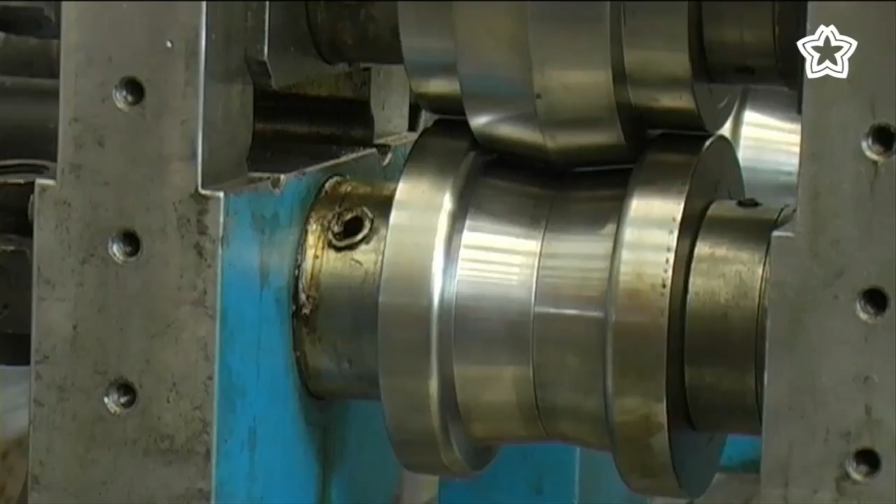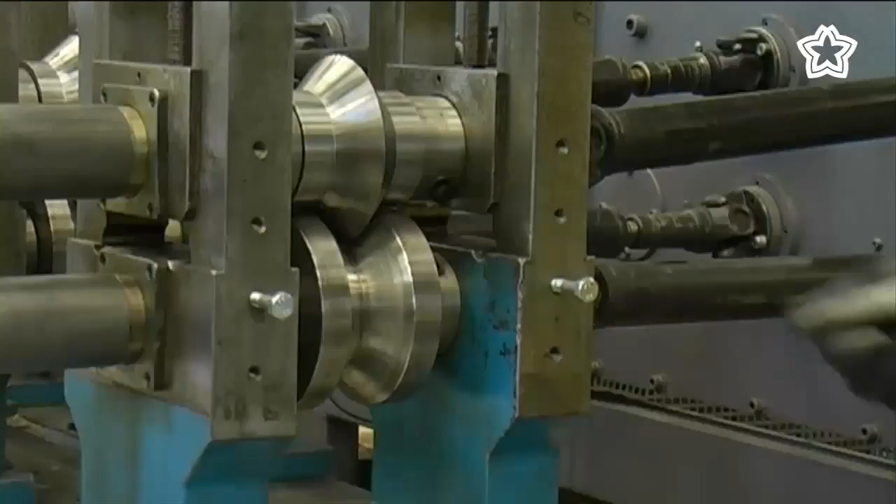Roll forming is a process where a metal sheet passes through a series of roll stands that change the sheet's shape. The sheet undergoes what is called a profile bending. Roll form details are very common in, for instance, the furniture, construction and car industry.

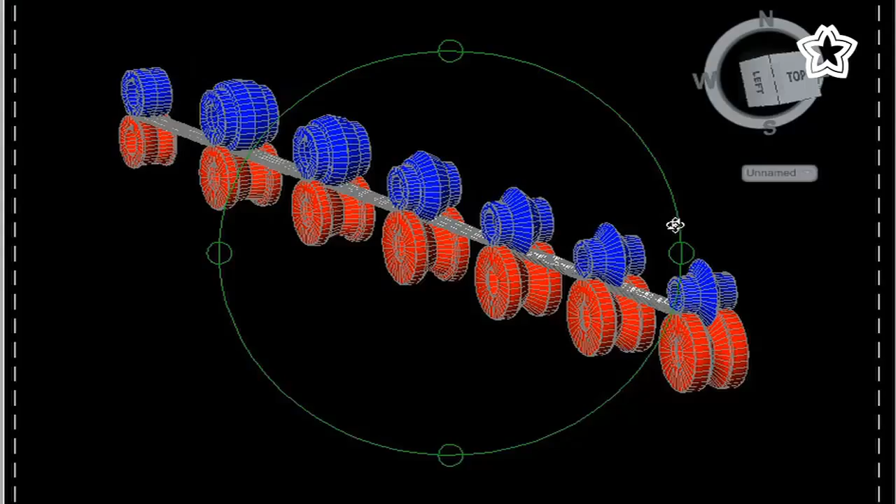It is possible to create advanced profile shapes in high-strength materials, and many different materials can be used. All materials that can be bent can also be roll formed. Roll forming is gentle on the material and has a minimum of wear on tools.

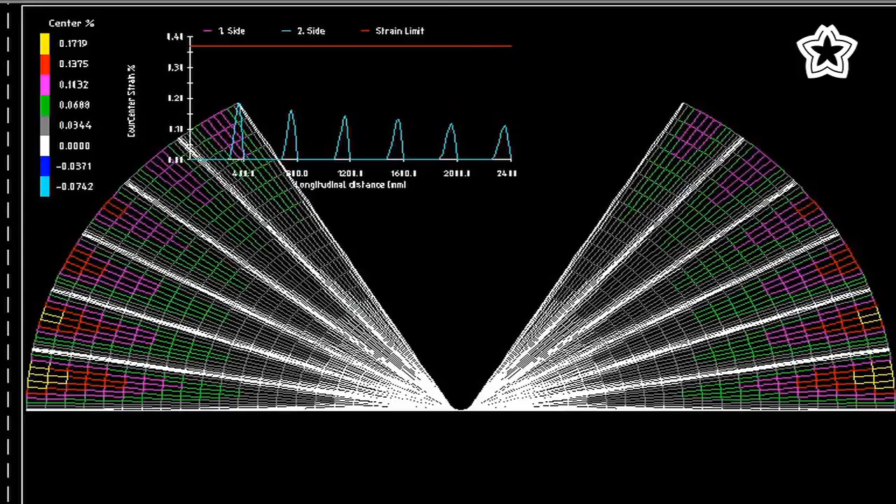Today, the roll forming process and the tools are designed in a computer environment before production. Computer simulation is an important tool in order to analyze the roll forming process. Geometry, forming forces and residual stress are factors that can be monitored in the material.

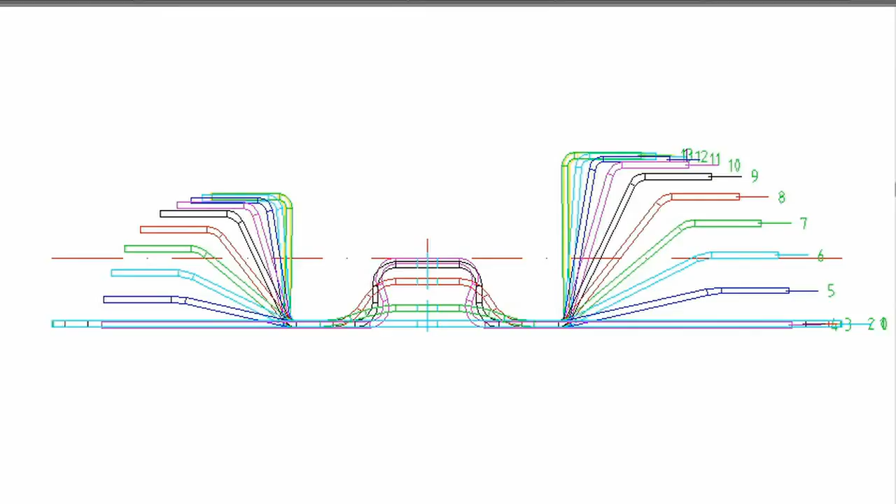The roll stands are designed so as to allow the material to undergo a gradual shape alteration. Here, the different steps are illustrated in a so-called flower pattern. This is a roll forming machine with 6 roll stands. It does not have an automatic feeder, instead it is fed manually.

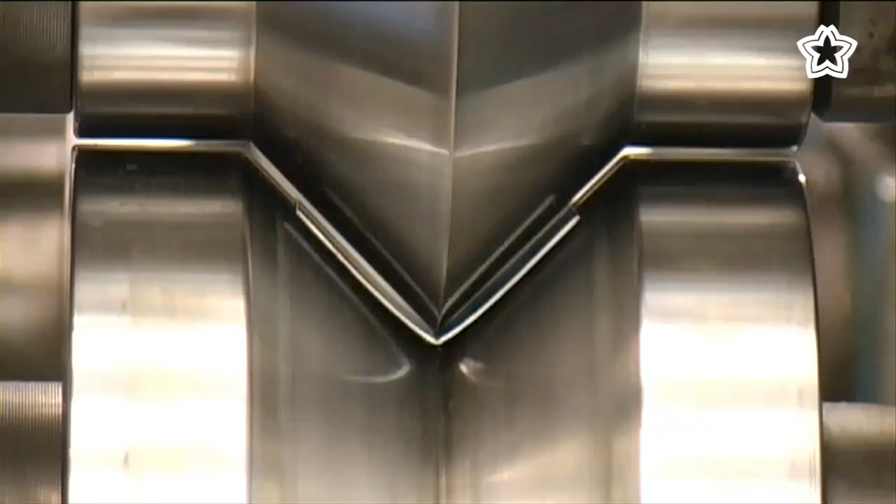More advanced profiles require more roll stands in order to reach a final result. This machine shapes the strip into a simple V profile. Note that the sheet springs back.

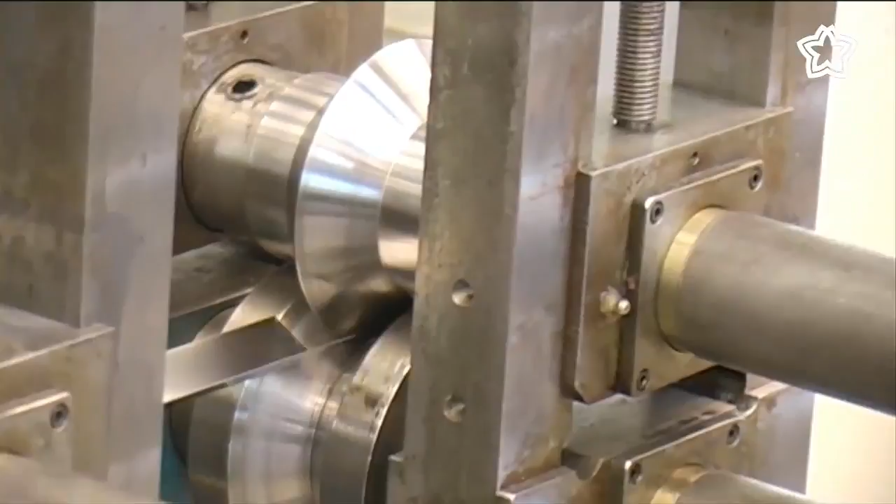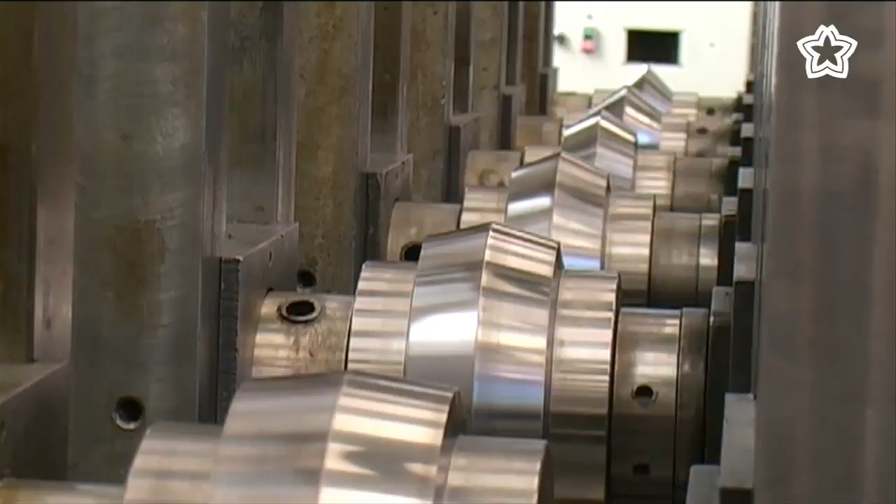Spring back is the elastic deformation that appears after shaping. Spring back is compensated for when the roll stands are constructed, thus overbending the sheet and letting it spring back into the correct form. What the roll forming tool looks like is decided by what kind of profile is needed.

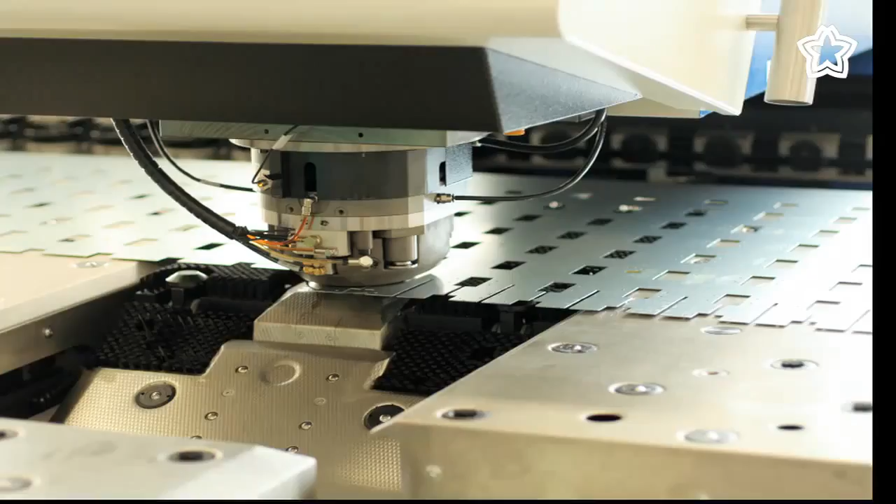The starting point is to draw a cross section where the required radii, thickness and dimensions are applied. The minimum radius for bending is decided by the thickness and the properties of the material. Here it is also decided if the profile will be punched or pre-cut and if it needs to pass through more preparatory stages before roll forming.

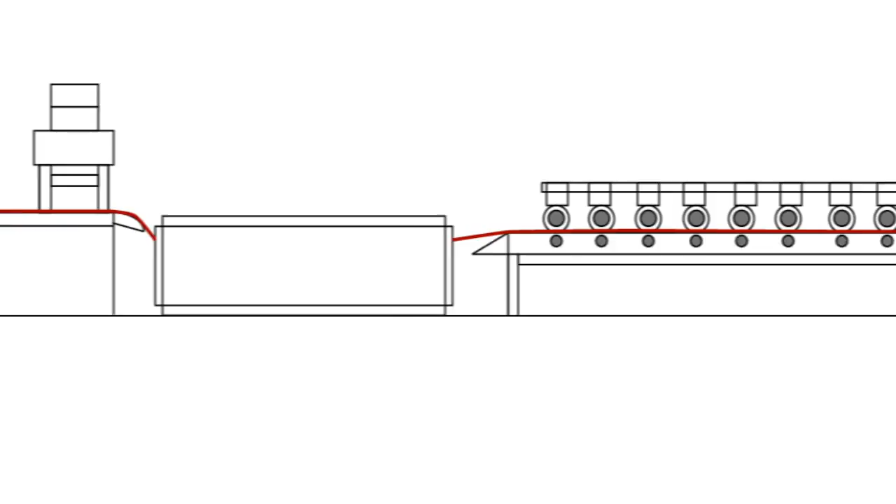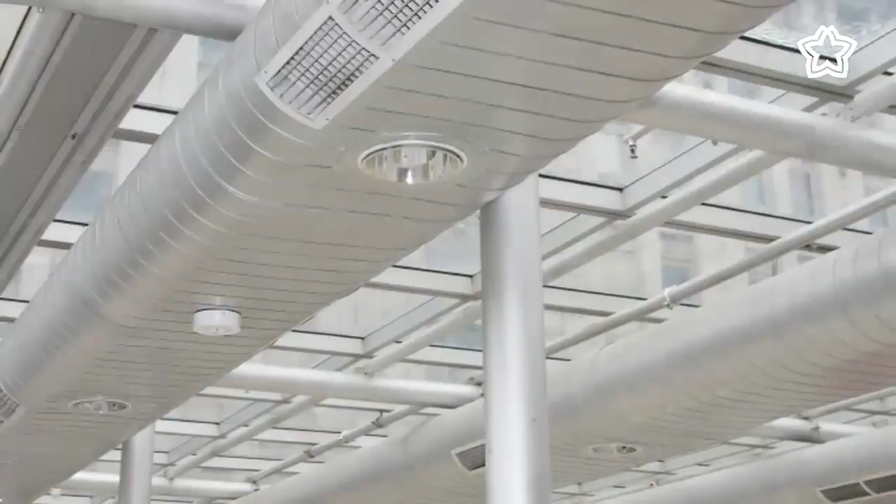There is a great demand for machines that can complete as many stages as possible in a single production line. If more operations can be incorporated into the production line, large volume processing will be more cost-effective. Roll forming can be a part of a production line producing profiles that do not require further refinement but are ready to be used immediately.